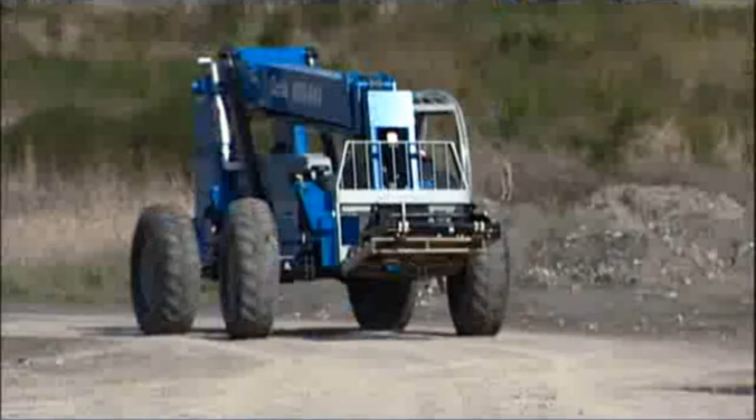Welcome to your Telehandler Operator Training Program. This program is intended to help you develop and use safe operating practices when operating variable reach rough terrain forklifts, also known as telehandlers. This program should be used in combination with a participant's guide and additional training materials which you should have received from a course trainer.

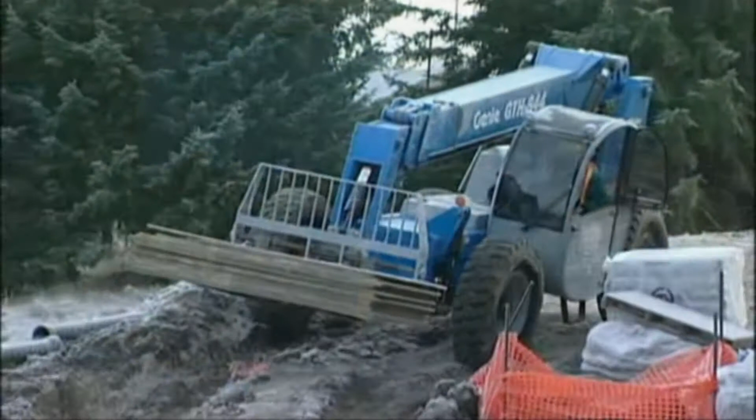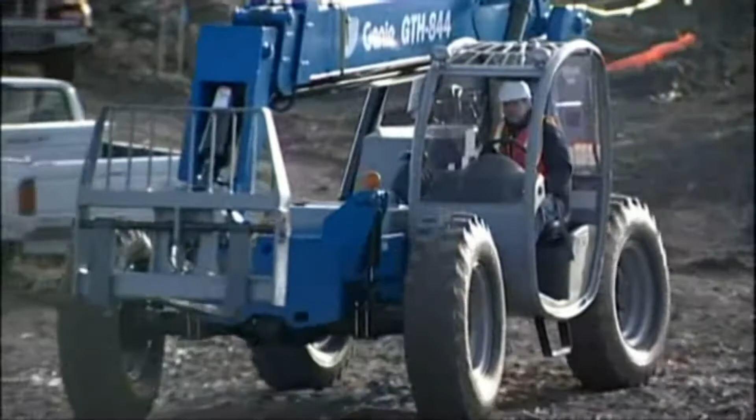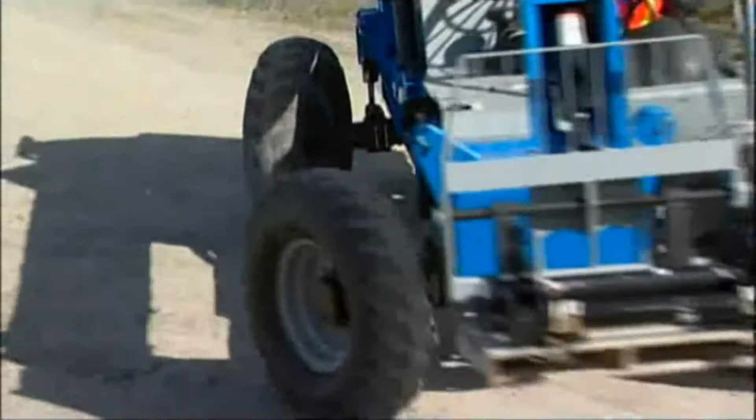Additional machine and workplace specific knowledge and operator certification are the responsibilities of the employer and you, the operator. The employer must ensure that each telehandler operator is competent and certified to operate a telehandler, as demonstrated by the successful completion of this training program's theoretical and practical evaluations, and as required in the applicable standards and regulations which will be discussed in the next section of this video.

As a telehandler operator, you can make a major contribution towards safety if you comply with all applicable job site, local, state, provincial, or federal rules and regulations related to the proper and safe use of telehandlers. Read, understand, and follow the instructions in this training program and in the manuals supplied with the equipment and any attachments. Use good, safe work practices in a common sense way. Are alert and free from the influences of alcohol, drugs, or medications that might affect eyesight, hearing, reactions, or judgment. Only have qualified operators who are trained and authorized, directed by informed and knowledgeable supervisors operating the machine.

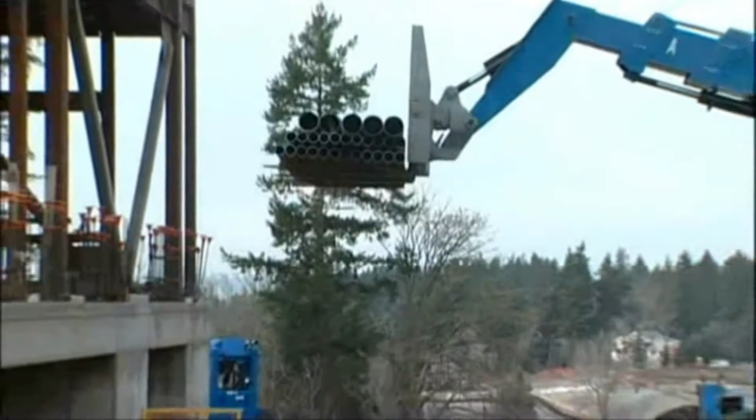Always read and understand the operator's manual and obey all safety rules and operating instructions before operating any telehandler. Complete information on the specific model that you plan to operate can be found in the operator's manual. The operator's manual should be considered a permanent part of your equipment and must remain with the machine at all times. Should you have any questions or find that you don't fully understand any subject covered in this presentation, please discuss them with your trainer.

We've divided this video into 4 sections. Section 1 deals with the responsibilities of all parties associated with the operation of telehandlers. In Section 2, we discuss the 5 key concepts of safe machine operation. In Section 3, we'll review the critical issues of center of gravity and the stability triangle. And finally, in Section 4, we will discuss what you need to do to demonstrate your proficiency in the hands-on training to become a qualified telehandler operator.

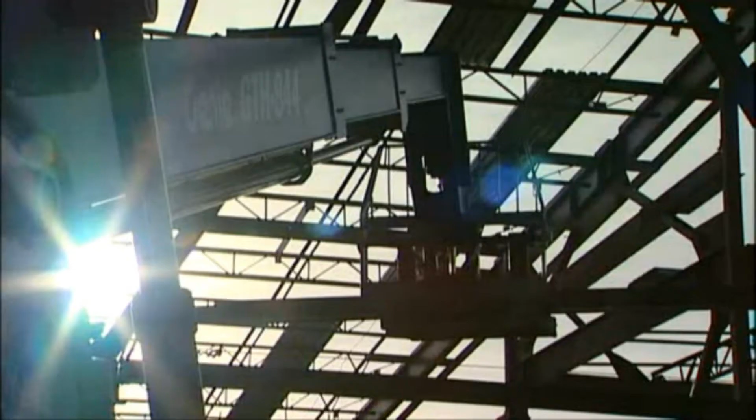Standards organizations worldwide have developed strict training requirements related to the elements of operation and maintenance of Class 7 variable reach rough terrain forklift trucks, commonly known as telehandlers. In the United States, the American National Standards Institute, or ANSI, and the Industrial Truck Standards Development Foundation, or ITSDF, have established the safety requirements for telehandlers. The recognized standard in the USA is ANSI ITSDF B56.6.

The Occupational Safety and Health Administration, or OSHA, has clarified the training requirements for telehandler operator training. It was added to Title 29, Code of Federal Regulations, Part 1910.178. The clarification was issued to improve the training of operators with the goal of reducing the number of injuries and deaths that occur as a result of inadequate operator training. Per OSHA, an evaluation of each telehandler operator's performance must be conducted at least once every 3 years.

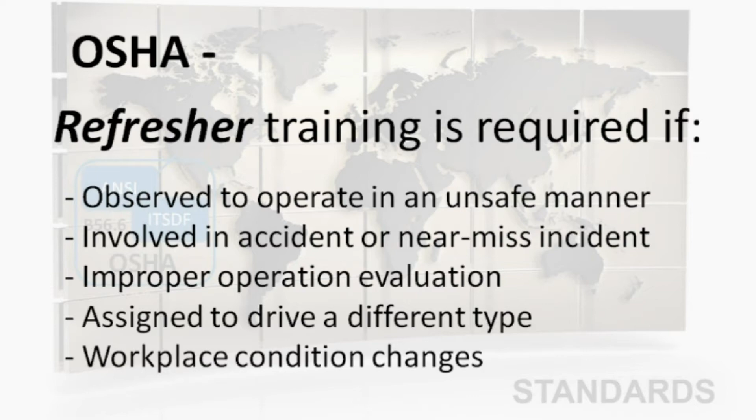Refresher training, including an evaluation of the effectiveness of that training, must be conducted to ensure that the operator has the knowledge and skills needed to operate the telehandler safely if one or more of the following conditions are true. 1. The operator has been observed to operate the vehicle in an unsafe manner. 2. The operator has been involved in an accident or near-miss incident. 3. The operator has received an evaluation that reveals that the operator is not operating the truck safely. 4. The operator is assigned to drive a different type of truck. Or 5. A condition in the workplace changes in a manner that could affect safe operation of the truck.

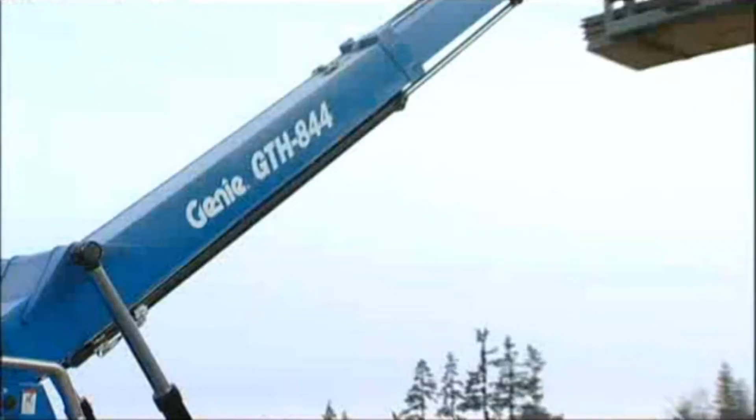Much like ANSI ITSDF in the USA, the Canadian Standards Association, or CSA, has published Canada's governing standard, CSA B335, for telehandlers. Per CSA B335, each telehandler operator must receive retraining at least once every 3 years. CSA B335 standards for telehandlers are enforced by OHS, which is similar to OSHA in the USA, and other provincial authorities. Since each province has their own OHS, it's important for you to be familiar with those rules and regulations that apply to the safe operation and maintenance of the telehandler in your area. Remember, only trained and authorized persons age 18 and over must be permitted to operate a telehandler.

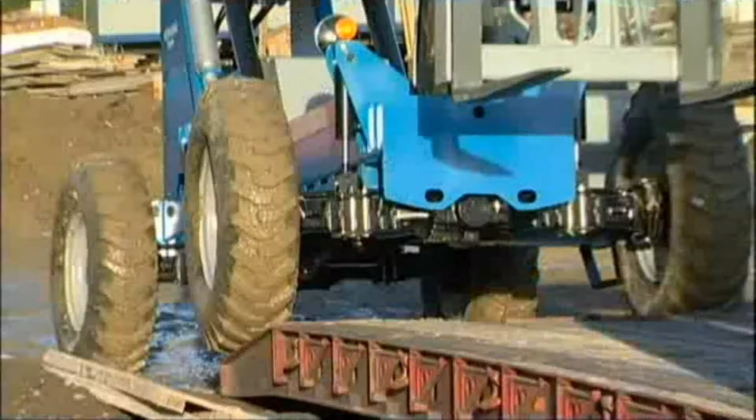It is the responsibility of the employer to verify that the following has been covered as part of the operator's training. Operators understand that safe operation is their responsibility, and operators are knowledgeable of and observe the applicable safety rules and practices within the appropriate rules, regulations, and standards that apply to the telehandler as well as the application.

As an operator, the safe operation of any telehandler is your responsibility. You must develop safe working habits and be aware of and avoid all hazardous conditions in order to protect yourself and those around you. You must also read and be familiar with the operator's manual for the particular telehandler being operated, and be familiar with the operation and function of all controls and instruments before operating the machine.

The operator's manual for the telehandler, and in many cases the attachment, contains key safety information that is related to safe use. As such, it is a critical component to the safe operation of the telehandler and should always be stored inside the operator's cab.

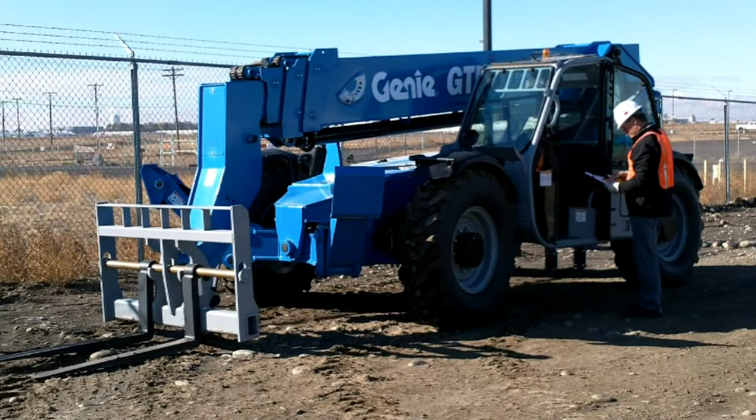There are 5 key concepts of safe machine operation, all of which you will find outlined in your operator's manual. They are: avoid hazardous situations, always perform a pre-operation inspection on the equipment, always perform function tests prior to use, inspect the workplace, and only use the machine as it was intended. These principles, if followed in sequence, will help you to operate the telehandler safely and efficiently.

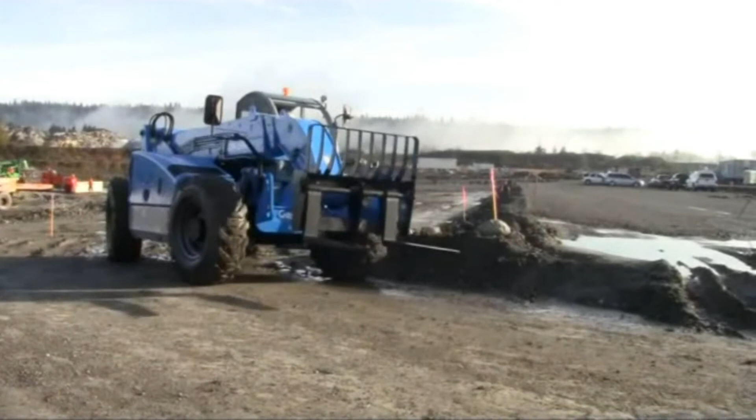It is critically important before you even get near the work environment or the machine to know what kind of hazards to be looking for. Some of the potential hazards we will be covering during this program are tip-over hazards, traveling hazards, collision hazards, and electrocution hazards. Common sense and planning are required to determine if your work activity will affect the lift capacity and the stability of the machine.

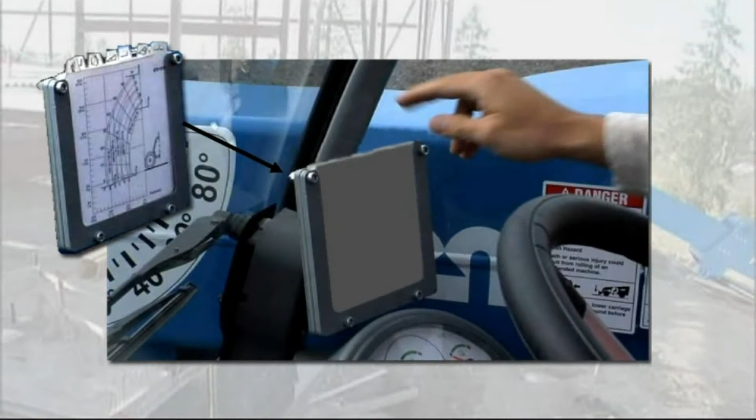Here are some situations to think about and avoid. Do not operate the machine if the load chart is missing. Do not exceed the rated capacity for each configuration. Do not raise the load unless the ground can support all forces imposed by the machine. Do not raise the boom unless the machine is level. The machine level indicator should be at 0 degrees.

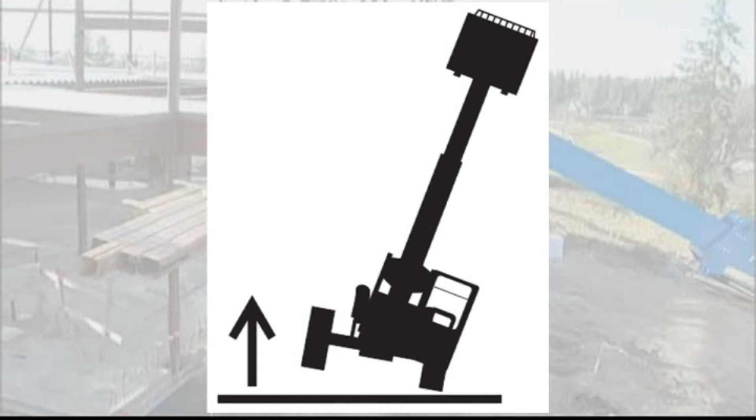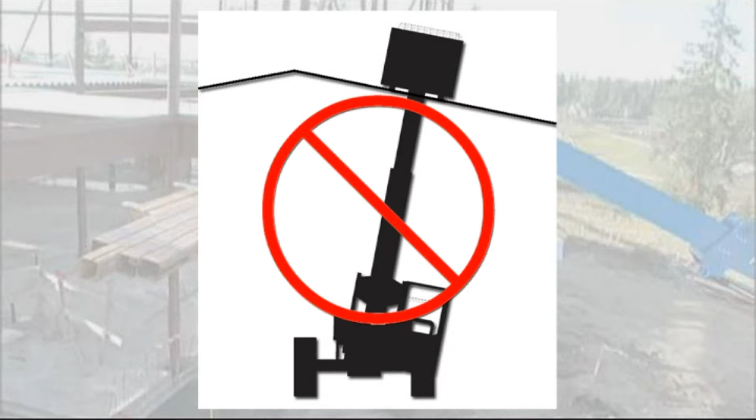Do not level the machine using the frame sway controls unless the boom angle indicator is at 0 degrees or less. Do not use the sway control to position an elevated load. Do not raise a load and then drive to position it. When driving, keep the boom at or below horizontal and keep the load close to the ground. Do not raise a load unless it is properly positioned and secured on the forks or attachment.

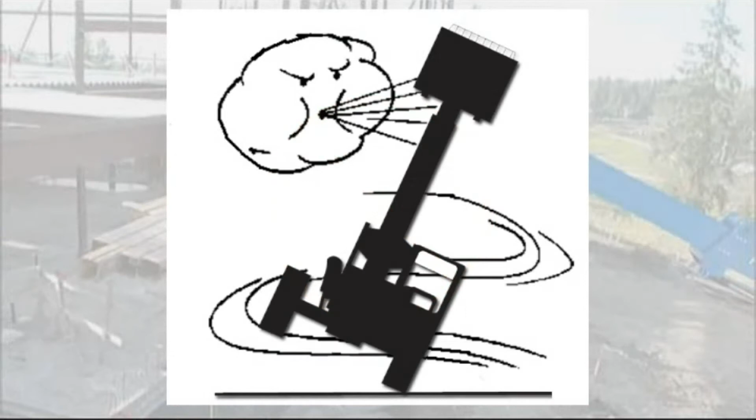Operate the machine at speeds that will keep the load under control. Start and stop movements smoothly. Do not lower a load without retracting the boom first. Do not operate the machine in strong or gusty winds. Do not increase the surface area of the carriage or the load. Increasing the area exposed to the wind will decrease machine stability.

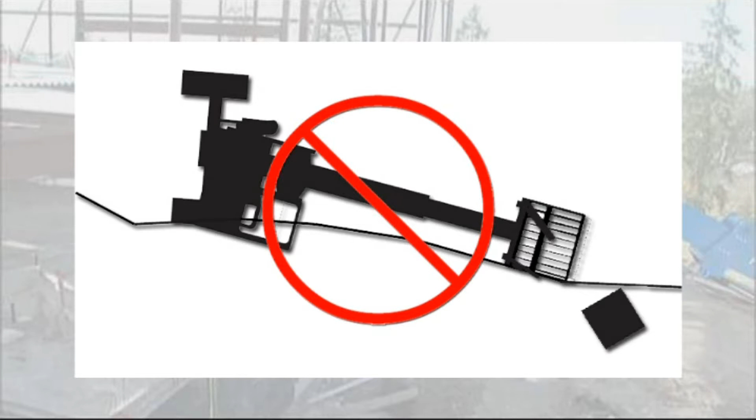Use extreme care and slow speeds while driving the machine in the travel position across uneven terrain, debris, unstable or slippery surfaces, and near holes and drop-offs. Limit travel path and speed according to the condition of the ground surface, traction, slope, location of personnel, and any other factors which may create a hazard.

When the machine is loaded, always travel with the load uphill. When the machine is unloaded, always travel with the forks or attachment downhill. On steep terrain, drive only up and down a hill, and always keep the machine in gear. Do not turn across the slope when the machine is traveling up or down a slope.

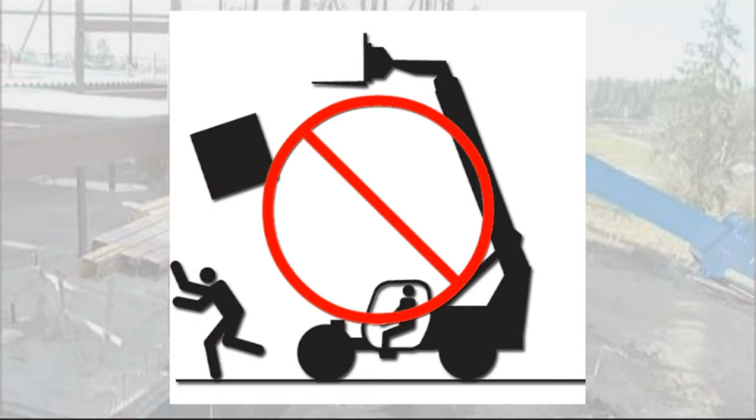Keep people, equipment, and material out of the work area. Do not operate the machine while people are under or near the elevated boom, whether it is loaded or unloaded. Do not drive the machine if visibility is obstructed.

Do not lift a suspended load or use a personnel work platform without first referring to the telehandler and attachment manufacturer's operating instructions and applicable job site, local, state, provincial, or federal rules and regulations related to the proper and safe use of such attachments. These applications have specific potential hazards which, if not avoided, could result in death or serious injury.

These machines are not electrically insulated. That means there is no protection for the operator, bystanders, or machine from electrical shock as a result of contact or unsafe proximity to power lines or any other electrical charge.

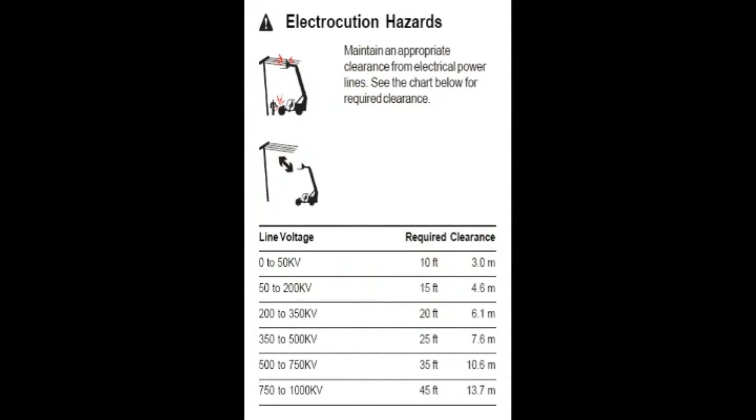Keep away from the machine if it contacts energized power lines. Personnel on the ground or in the platform must not touch or operate the machine until energized power lines are shut off. Do not operate the machine during lightning or storms. Safety information about required clearance from power lines and other electrically charged devices can be found in the operator's manual and on safety signs on the machine.

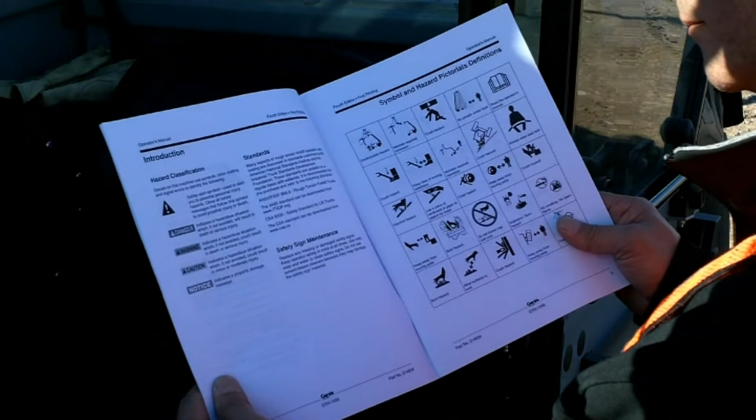Additional potential hazards can be found in the operator's manual. Be sure that you are familiar with these hazards before operation and utilize all means, including those provided in the operator's manual and by the supervisor or employer, to avoid them. There are also more resources on the machine in the form of safety and instructional decals.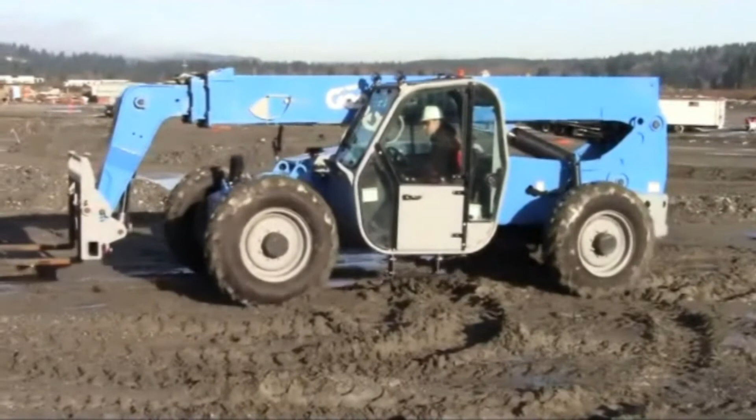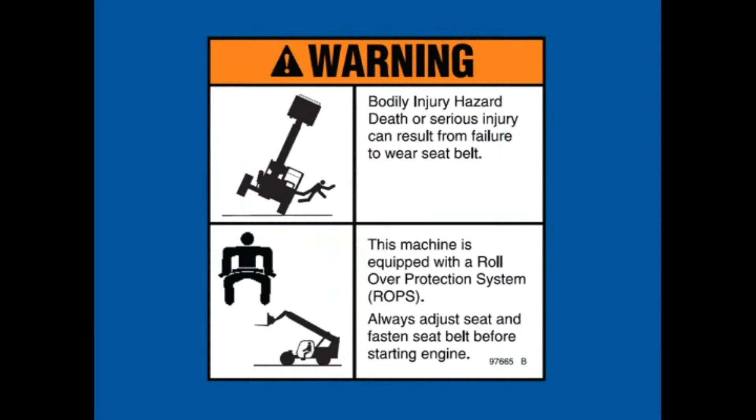The safety decals have the safety markings of danger, which indicates a hazardous situation that, if not avoided, will result in death or serious injury. Warning, which indicates a hazardous situation that, if not avoided, could result in death or serious injury. And caution, which indicates a hazardous situation that, if not avoided, could result in minor or moderate injury. The green or blue instructional decals indicate operation or maintenance information.

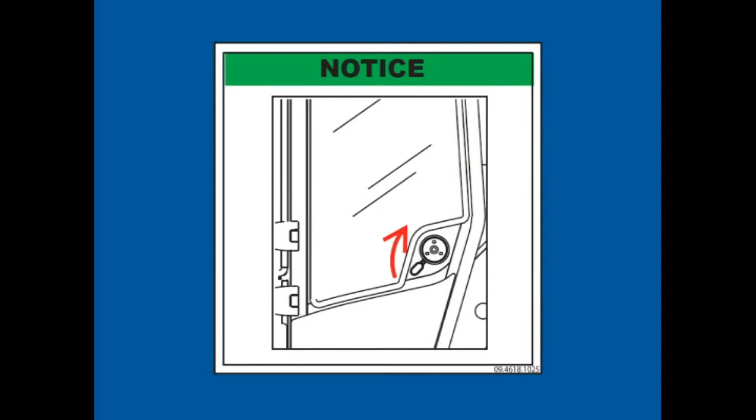Operators must be properly trained and use their best judgment and experience to take the necessary precautions to avoid these hazards and any others that may exist. Operators must assess the job site variables and avoid exceeding the machine's and the operator's capabilities for terrain and conditions.

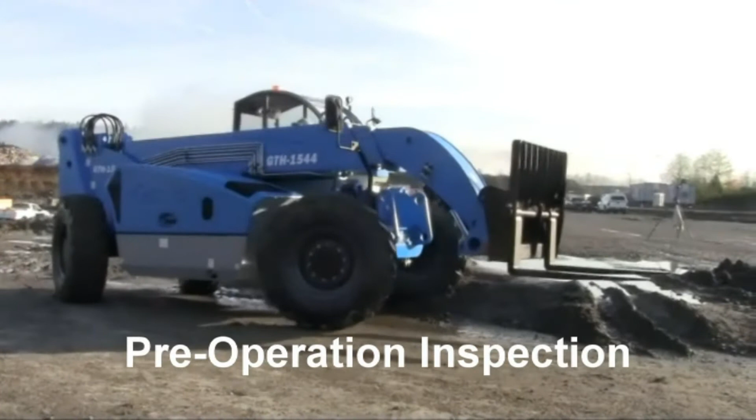A second key concept for safe machine operation is the pre-operation inspection. This is important because very often you don't know where the machine has been or how it's been maintained. This visual inspection is designed to keep the operator out of harm's way by discovering if anything is apparently wrong with the machine before the operator performs the function tests. You are looking for things like modifications, damage, loose or missing parts, and hydraulic or other fluid leaks. Your operator's manual has a complete checklist of items you need to inspect.

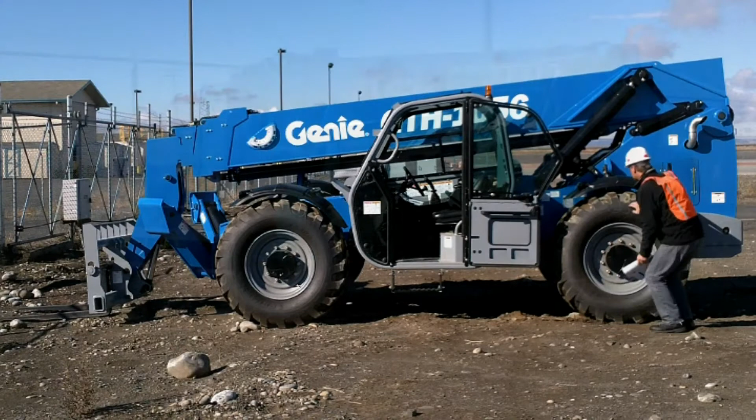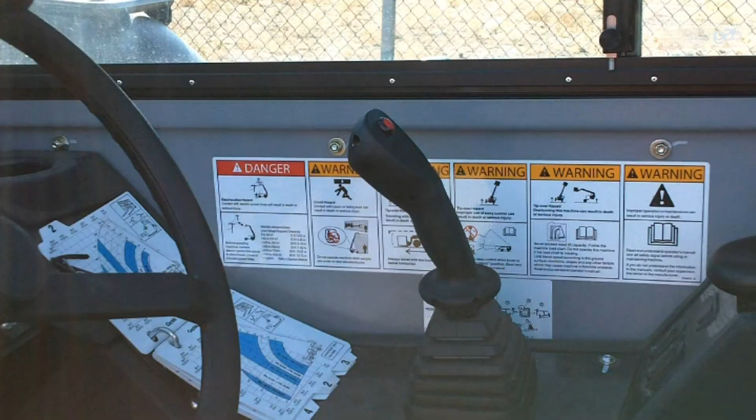Let's look at a few examples that apply to telehandlers. Be sure that the operator's and safety manuals are complete, legible, and in the storage container located in the operator's compartment. Be sure that all decals are legible and in place. Check for coolant, engine oil, and hydraulic oil leaks and proper levels.

Electrical components. Hydraulic components. Boom components. Engine and engine components. Pins, bolts, and other fasteners. And wheels and tires.

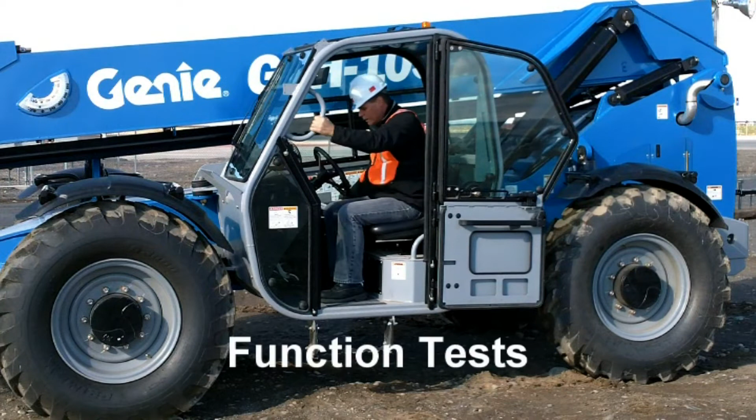If the machine checks out, you are ready to perform the function tests, our third key concept for safe machine operation. We do function tests to discover any malfunctions before the machine is put into service and to verify the machine is operating properly. Before you begin testing functions, select an area that is firm, level, and free of ground and overhead obstructions. Be sure there is no load on the forks or attachment. Follow the testing sequence listed in the operator's manual. If a machine fails a test, it must be removed from service, repaired, and re-inspected before it can be used.

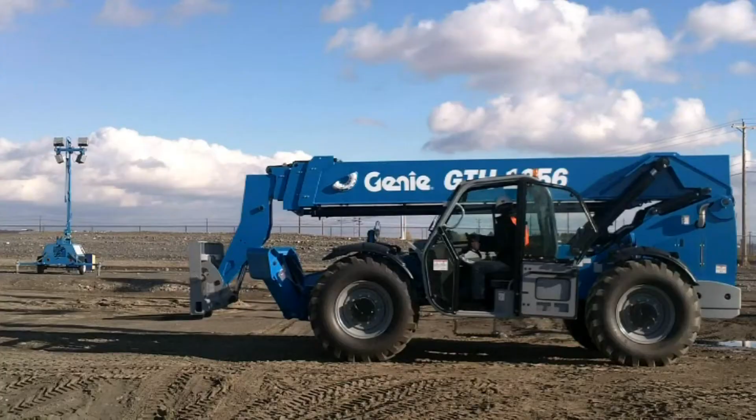Let's take a look at a few examples of function tests that apply to telehandlers: parking brake, service brake, steering, stabilizers,

frame sway, boom raise and lower, boom extend and retract, fork tilt. Complete lists of function tests are located in your operator's manual.

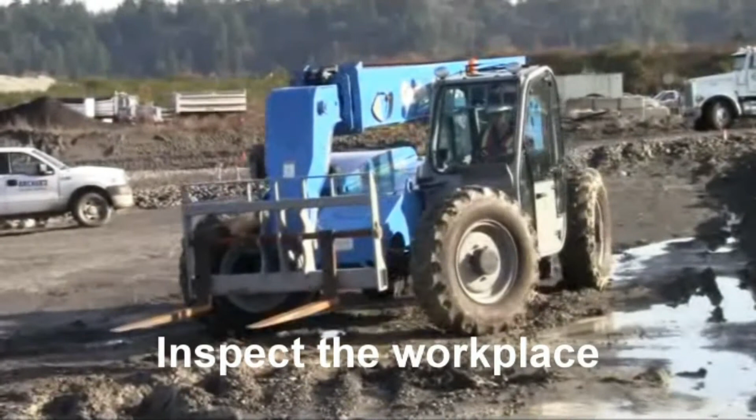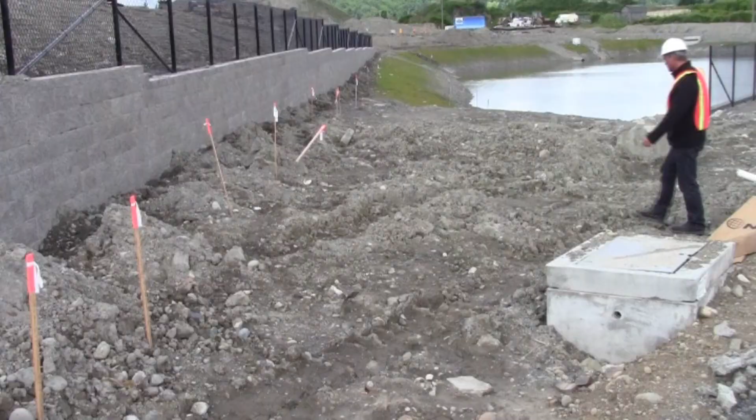Our fourth key concept for safe machine operation is the workplace inspection. Earlier, we learned how to identify tip-over, traveling, collision, and electrocution hazards. Now, as you move on to the worksite, you can see what circumstances will contribute to hazardous situations. The workplace inspection helps the operator determine if the workplace is suitable for safe machine operation. It should be performed by the operator prior to moving the machine to the workplace.

It is the operator's responsibility to read and remember the workplace hazards, then watch for and avoid them while moving, setting up, and operating the machine. Remember, if these hazardous situations do present themselves, it's your responsibility as an operator to clear those obstacles.

Keep your eyes open for drop-offs, slopes, and holes, floor obstructions and hazardous locations, overhead obstructions, energized power lines, wind and unsafe weather conditions. The complete inspection is listed in the operator's manual. It is also important to note that you, as an operator, have an obligation to inform the user or owner if a work environment contains even one thing that will prevent you from safely doing your job.

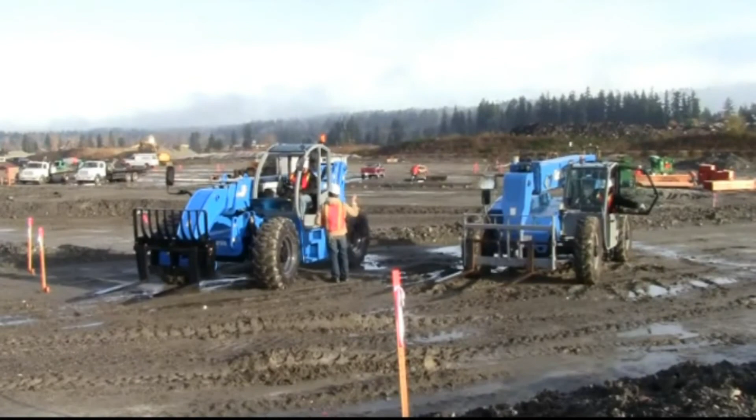The fifth key concept for safe machine operation is to only use the machine as it was intended. The Operating Instructions section in the Operator's Manual provides instructions for each aspect of telehandler operation. It is the operator's responsibility to follow all the safety rules and instructions in the Safety and Operator's Manuals. Using the machine for anything other than the activity specified in the Operator's Manual is unsafe.

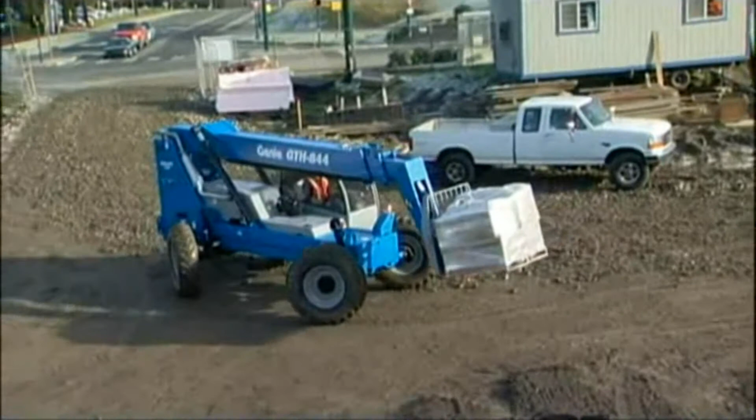Only trained and authorized personnel should be permitted to operate a telehandler. If more than one operator is expected to use a machine at different times in the same work shift, they must also be trained and authorized operators, and they too are expected to follow all safety rules and instructions in the operators and safety manuals. That means every new operator should perform a pre-operation inspection, function tests, and a workplace inspection prior to each work shift.

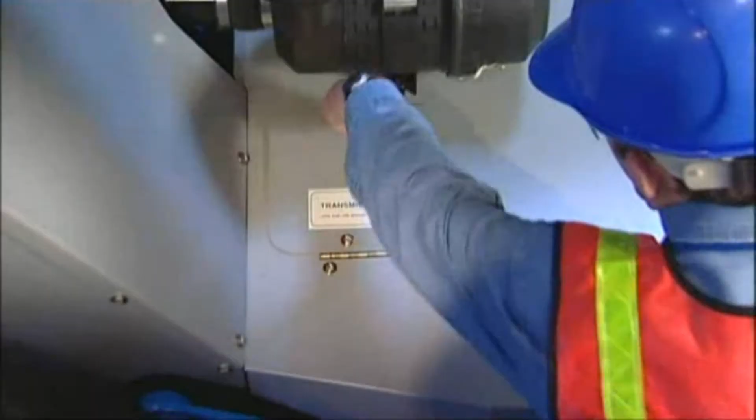The operation of any telehandler is subject to certain hazards that can be protected against only by the exercise of intelligence, care, and common sense, and not by mechanical means. It is essential that the operation, maintenance, and service of telehandlers is performed only by competent, careful people trained in the intended use, safe operation, maintenance, and service of this type of equipment.

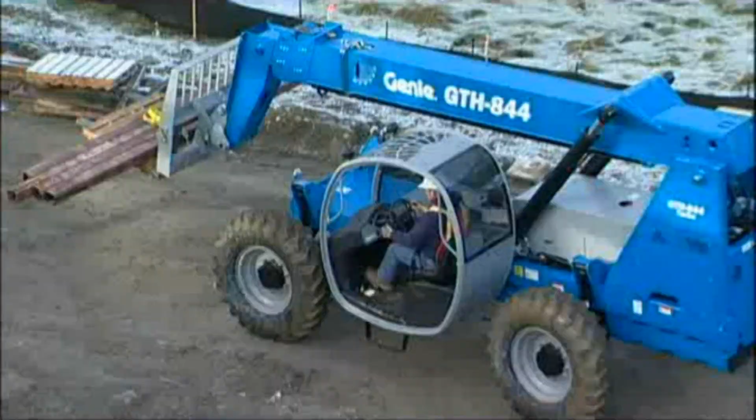Remember, if you don't follow all safety instructions and exercise safe operating procedures, serious injury or even death could occur. So please, always follow the instructions that the manufacturer has set out for both safety rules and operating instructions.

There are many conditions that may affect the stability of a telehandler during operation, such as ground conditions, surface grade, travel speed, wind conditions, weight or size of load, and tire air pressures. These conditions can not only have an influence on stability, but also load handling and safe machine operation.

Two critical concepts that you as an operator must know and understand are the theories of center of gravity and the stability triangle. Center of gravity is the single point about which an object is balanced in all directions. It is important to understand the theory of center of gravity during machine operation in order to avoid conditions of instability. The stability triangle is formed by 3 points on the machine: the 2 front tires, or stabilizers, and the pivot point at the center of the rear axle.

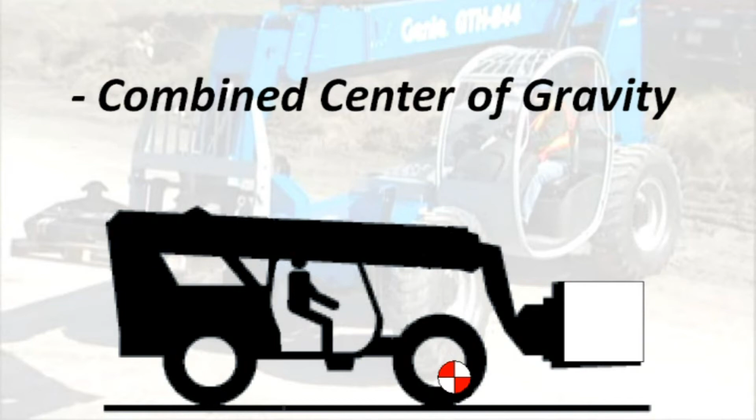During machine operation, the location of center of gravity can move under different operating conditions, such as traveling, braking, and lifting the load. If the center of gravity moves outside the stability triangle at any time during operation, the telehandler will become unstable and tip over. In addition, each load has its own center of gravity. When that load is placed on a telehandler, it creates what is called a combined center of gravity. It is critical to understand how this combined center of gravity can impact machine stability. Let's take a look at some typical scenarios that you may encounter.

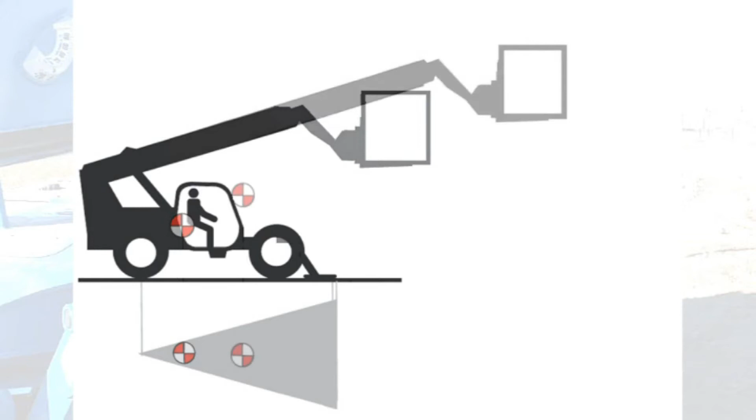When a telehandler is loaded in the stowed position, the center of gravity moves forward and lower towards the front of the machine and closer to the operating surface. Extending the boom of the telehandler when the machine is loaded causes the center of gravity to move higher and toward the front of the machine.

The heavier the load being lifted, the further the combined center of gravity will move toward the front of the stability triangle. Remember, if the combined center of gravity moves beyond the front of the stability triangle due to lifting a load in excess of the machine's rated capacity, a forward tip over may occur. Always refer to the machine's load chart and never exceed the machine's rated lift capacity in any of the lifting zones.

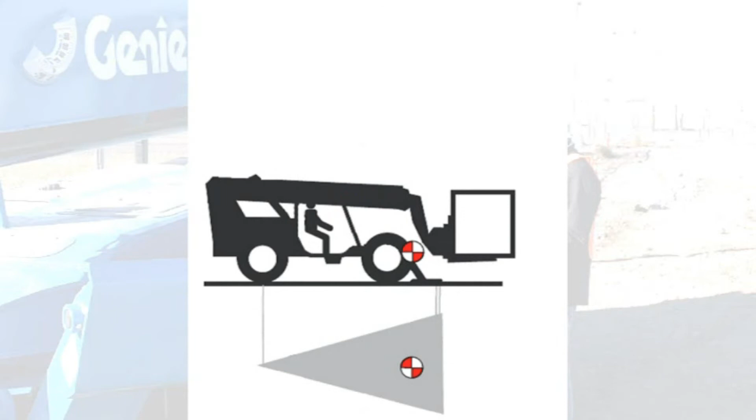Raising the retracted boom of the telehandler, with or without the load, moves the center of gravity higher, away from the ground, and toward the rear of the machine. Lowering the retracted boom of the telehandler, with or without a load, moves the center of gravity lower and toward the front of the machine.

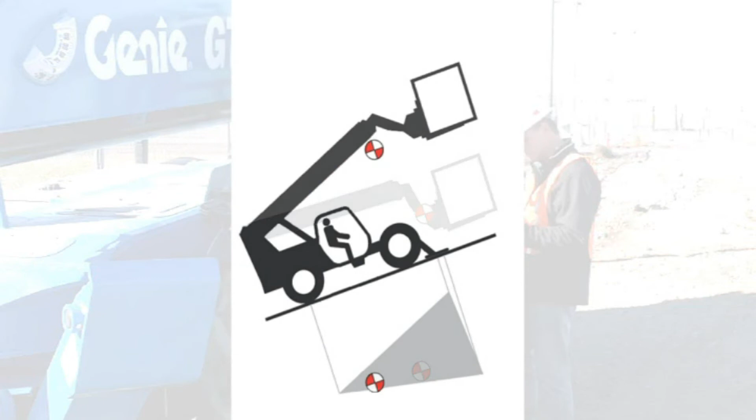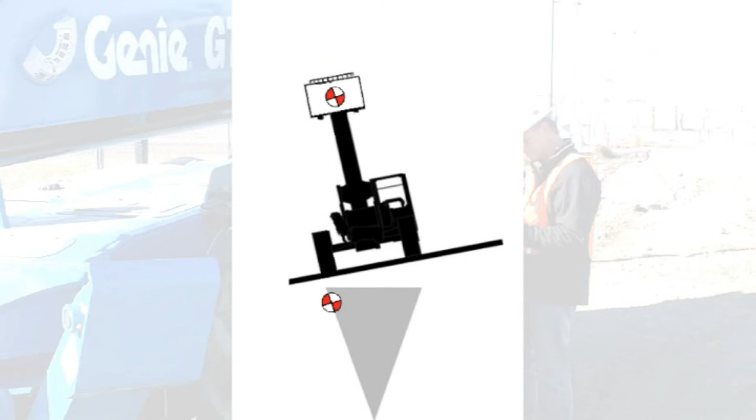If the boom is raised to a high boom angle while the telehandler is on a slope, the center of gravity will shift rearwards and out of the stability triangle, and this will cause a backward tip over. Remember, the telehandler boom should never be raised if the machine is not level. If the boom is being raised while the machine is on a side slope or not level, the center of gravity moves higher and toward the rear of the telehandler. As the boom continues to be raised, the center of gravity position may fall outside the stability triangle, and this will cause a side tip over.

Use the frame sway controls to level the machine on a slope before raising the boom to improve machine stability. Do not use the frame sway controls if the boom angle is above 0 degrees. Do not raise the boom if the machine is not level.

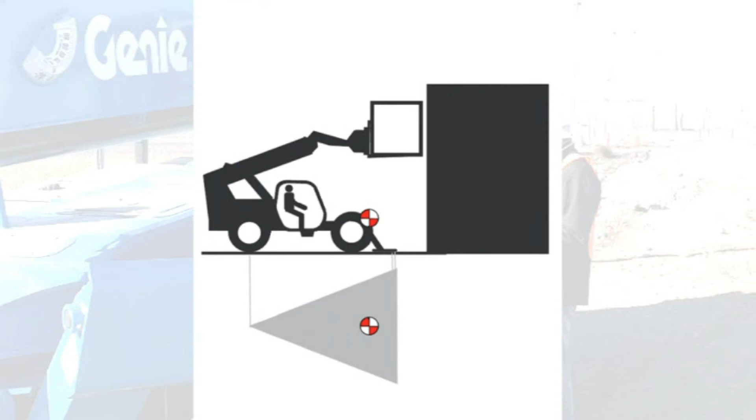When the telehandler forks are loaded and the boom is raised from stowed position, the center of gravity moves higher and toward the front of the machine. Unloading the telehandler when the boom is raised moves the center of gravity lower and toward the rear of the machine.

Telehandler operation, such as machine motion or suspended loads, creates dynamic forces on the machine and the load. Dynamic forces can suddenly shift the location of the combined center of gravity to outside the stability triangle and cause the machine to become unstable. Let's take a look at some conditions which may cause instability due to dynamic forces.

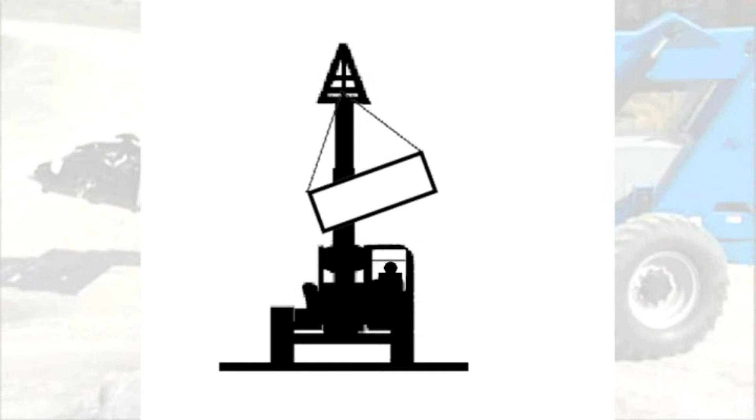The handling of suspended loads by means of a truss boom or other device can introduce dynamic forces affecting the stability of a rough terrain forklift truck that are not considered in the stability criteria of ANSI ITSDF B56.6 safety standards. Grades and sudden starts, stops, and turns can cause the load to swing and create a serious hazard if not externally stabilized.

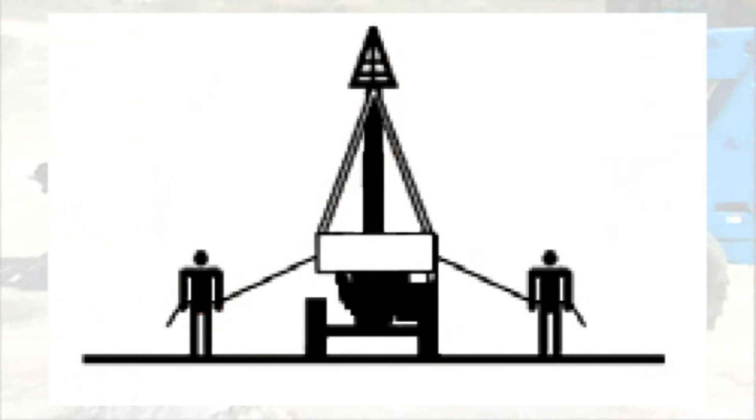If lifting and transporting a suspended load is permitted on the job site, the following criteria should be followed. The user and the operator must comply with all applicable job site, local, state, provincial, or federal rules, regulations, directives, and standards related to the use of the truck with a suspended load. The user must ensure that the operating personnel are given the necessary training.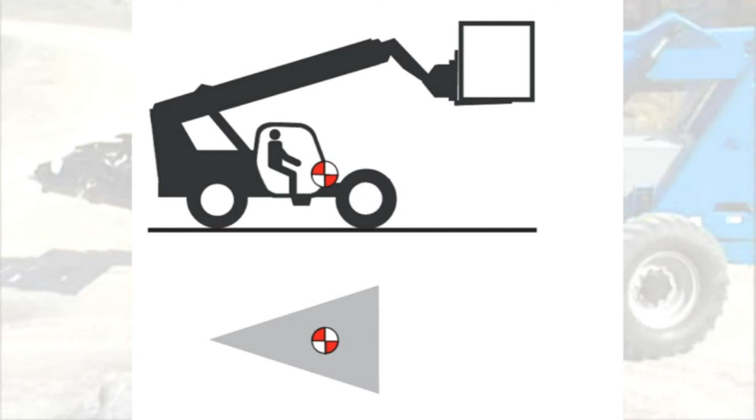When a telehandler is traveling forward with a load and heavy braking is applied, the change in dynamic forces results in a sudden forward shift in the load's center of gravity. If the telehandler's speed before braking is significant, the combined center of gravity may move outside the stability triangle, which could cause a forward tip over.

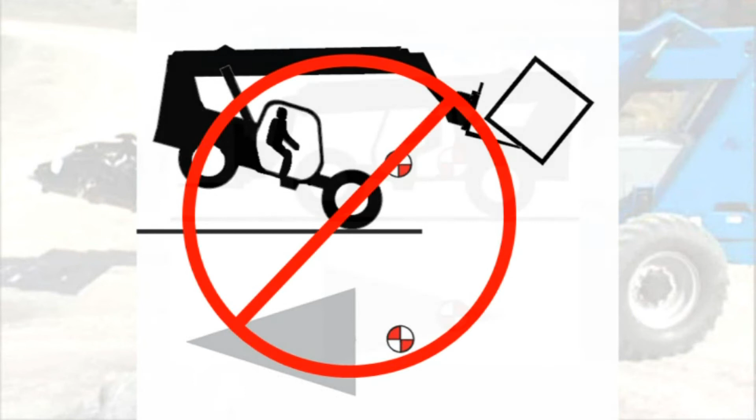Turning the telehandler, with or without a load, causes lateral dynamic force, which can result in a sideways shift in the center of gravity. If the telehandler turning speed is high, the center of gravity may move outside the stability triangle, which could cause a side tip over.

Some telehandler models are equipped with a rear axle lock that engages when the boom angle and extension reach a certain point. When the rear axle lock is engaged, the stability zone for the telehandler changes from a triangle to a trapezoid, increasing stability in certain situations.

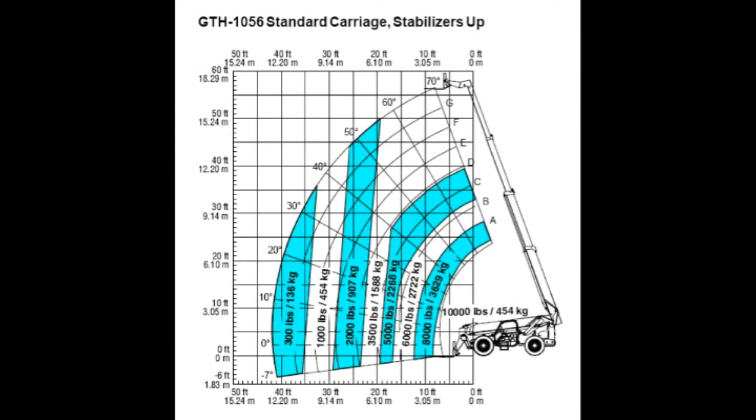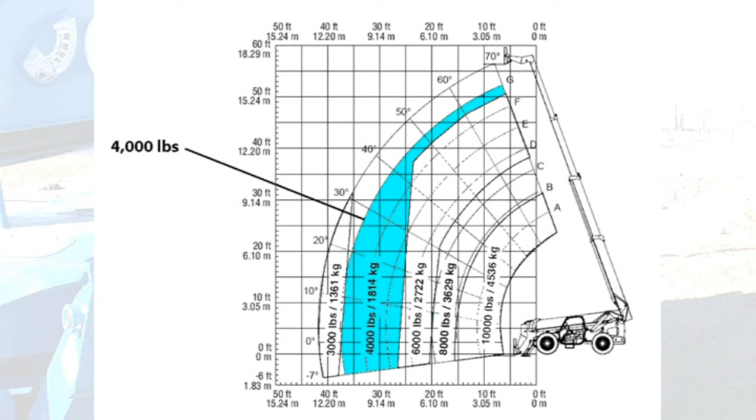Again, always refer to the machine's load chart and never exceed the machine's rated lift capacity in any of the lifting zones. Load charts show the maximum lift capacity at the various lifting heights and boom elevation angles. The maximum allowable attachment capacity referenced on the load chart changes as the boom is raised and extended to maintain the stability of the telehandler.

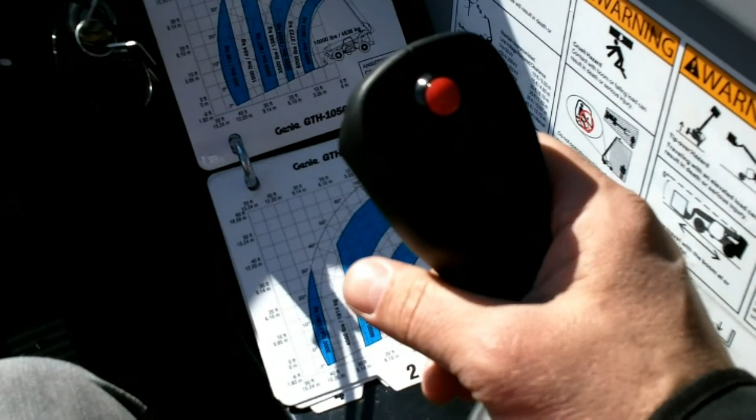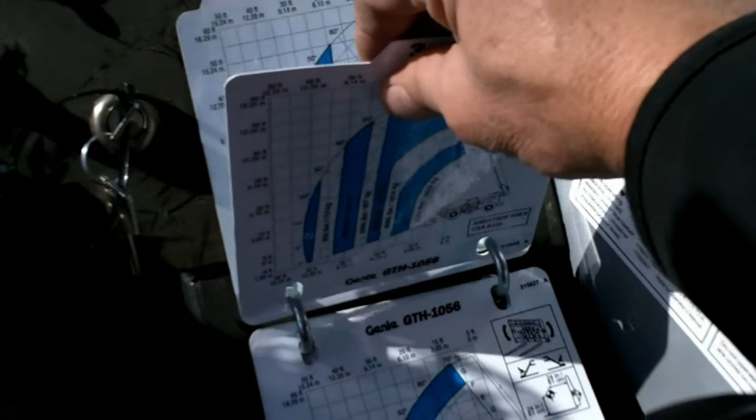Load charts are typically located inside the operator's cabin and should always be clearly legible and visible to the operator in the normal operating position. Be sure that the load chart in the telehandler matches the machine and the approved attachment on the machine before lifting the load. Never operate a telehandler without the proper load chart.

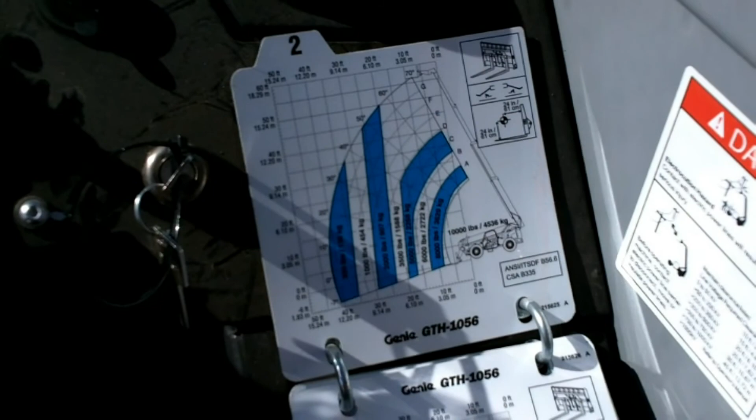If you always read and apply the information found on the load chart and remain consciously aware of how the combined center of gravity and the stability triangle interact, you can make a significant and positive impact on your safety and the safety of those around you.

If you have successfully completed your participant's guide and the written test, you are almost ready to operate a telehandler. Read the operator's manual for the specific machine you wish to operate. Then you must operate the machine to demonstrate proficiency in front of a qualified person. Let's review the steps one more time.

First, read and understand your operator's manual. Be aware of hazards to look out for and avoid them. Perform a pre-operation inspection on the equipment. Perform function tests prior to use. Inspect the workplace for unsafe conditions and familiarization. And only use the machine as the manufacturer intended.

Your trainer will test your proficiency using the hands-on proficiency demonstration check sheet supplied with this training program. Once you have successfully completed all of the steps, you will be considered a qualified telehandler operator. We know you can succeed, but it's up to you. Good luck, and be safe out there.